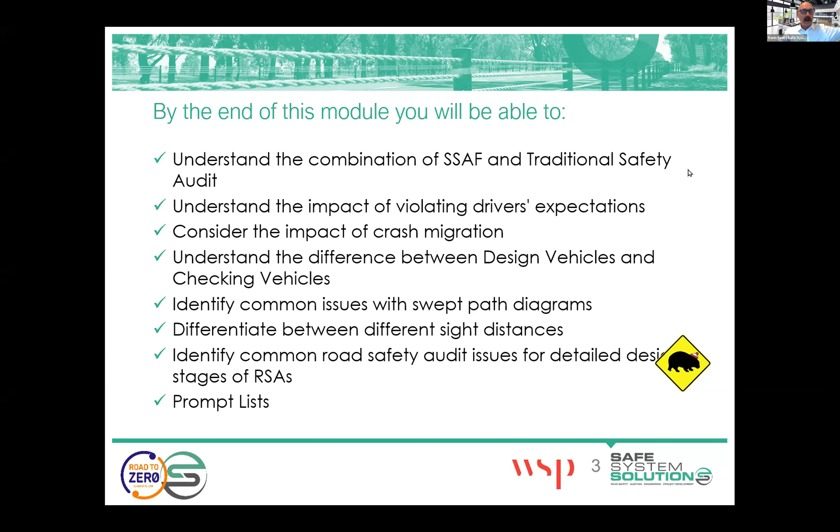The new Safe System Audit Guidelines came out last year as part of the Road to Zero edition. What they did was combine the traditional safety audit we ran in New Zealand with the Safe System Assessment Framework. So there were two things going on, and as I said, Ken's already covered the Safe System Assessment Framework. Going forward, I'm going to focus more on the traditional safety audit. Just looking at the start, the safe system audit stages are: concept, preliminary design, detailed design, and post-construction or pre-opening, and these line up with the project life cycle or project development.

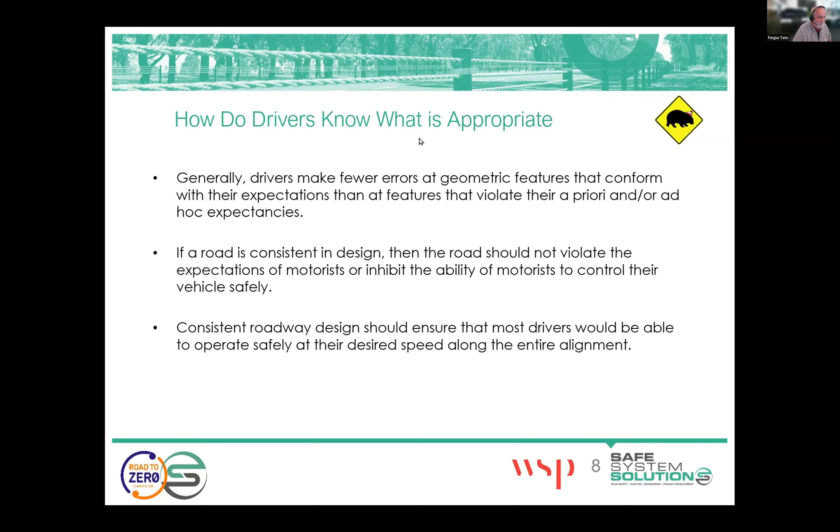As I think I said earlier on, the big one for many networks is curves. Any clown can drive along a straight road - it's the curves. We find that 30% of our DSIs, typically on the state highway network, are on curves. So they're a big ticket item out there.

And there are two sorts of things that impact the likelihood of drivers making a mistake. The first are curves that are difficult to read, that it's hard for drivers to actually perceive them. And the second is out-of-context curves.

I'm going to talk about both of those, but I'm going to start off going back to uni or tech with the mighty curve equation, which says E, which is super elevation, plus F, which is friction - those are the resisting forces. They resist the loss of control forces, which are based on V squared, velocity, over 127R.

Now, my question to you is, in the poll, which of these things has the biggest impact or the most influence on curve negotiation?

Okay, so just recapping there, E is super elevation, F is friction, and we've got V velocity and R being the radius of the curve.

Now, as people pop their thoughts in there, I can see people scratching their heads at the moment. I can't see them, of course, the camera's not on, but I can imagine them scratching their heads.

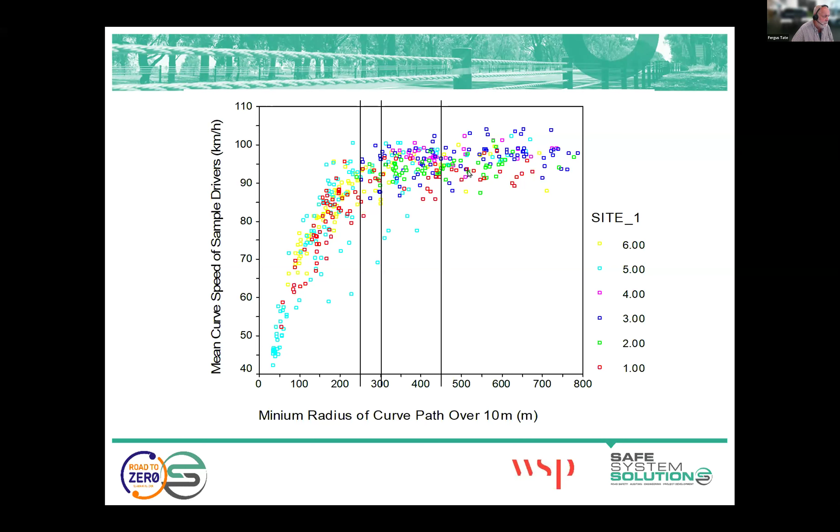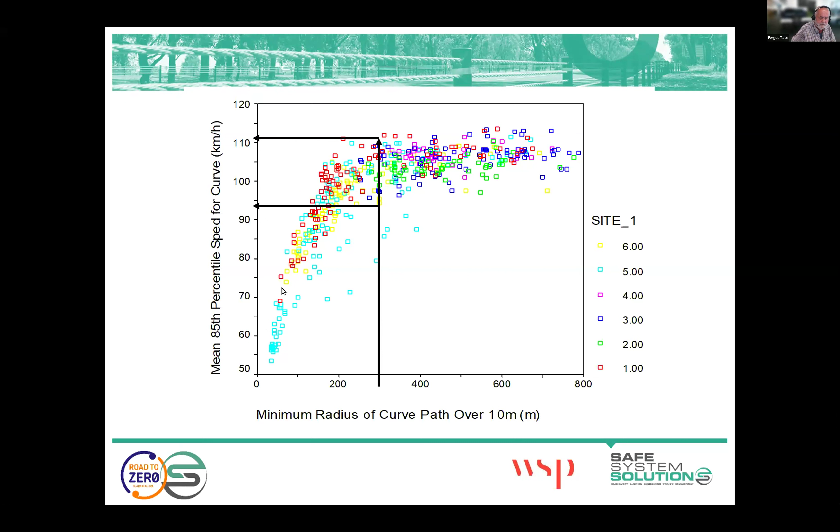So that's really important. So these are the curves that are hard to read. And again, looking at the 85th percentile speeds at a 300 radius curve, anything from sort of 110 to 95 in there, it makes a big difference. You can see with the 85th percentile speeds, it's actually even more pronounced, this sort of straight effect, and then suddenly at around 300, she starts to dive away. So that's the difficult zone.

So maybe I'll ask a question then to the group before we jump too much further on. For that difficult zone, what do people think might be ways to lessen that risk? We'll see what they come up with.

And Juliet's asking, do we have any images to show what those radius curves look like? No, we don't have any in this presentation. I might, while Ferg's doing that, try and dig out a few. It's a good question, just so people can visualize sort of what is a sharper curve compared to a less sharp curve. Thanks for that, Juliet. I'll see what I can dig out.

So we've got advisory speed signs, chevrons, so cams, chevron alignment markers, advisory speeds, advanced warning signs, different advanced warning signs. Oh, we've got somebody's popped in rumble strips on the approach to the curve. Electronic warning signs, possibly vehicle activated style signs, barrier systems. So looking at the severity of the incidents that occur, ideally realigning, so big bucks there. Otherwise, shoulder widening barriers and signage, chevrons and the like. So anything in that big list there that really pops out in your mind?

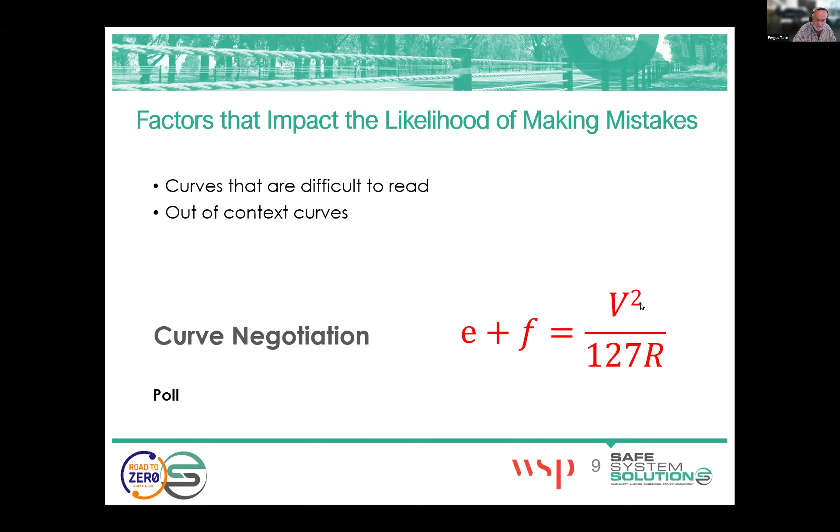And things. And we get some very good results from speed activated curve warning signs. There was a very good thesis done by Steve James from Waka Kotahi on the impact of speed warning signs. So he's now at Urban Connection. He's worth having a chat to if you're interested in that space. He's done some good work in there for his thesis.

The other thing that I think is really important when we're coming to it is the length of the curve. If it's a shorter curve, or like a kink in the road, it's easier to flat line, and it's easier to basically get through. The longer the curves are, the higher the crash rate. Mainly because there's more length of curve to crash in, and we're talking about crashes per curve, but it's harder to flatline.

And if you make a mistake on entry, it's much harder to correct because the curve is long and you're stuck with your decision effectively. So again, long curves in that range are even worse. I don't want you to go in that range, but sometimes we have to, in which case make sure that

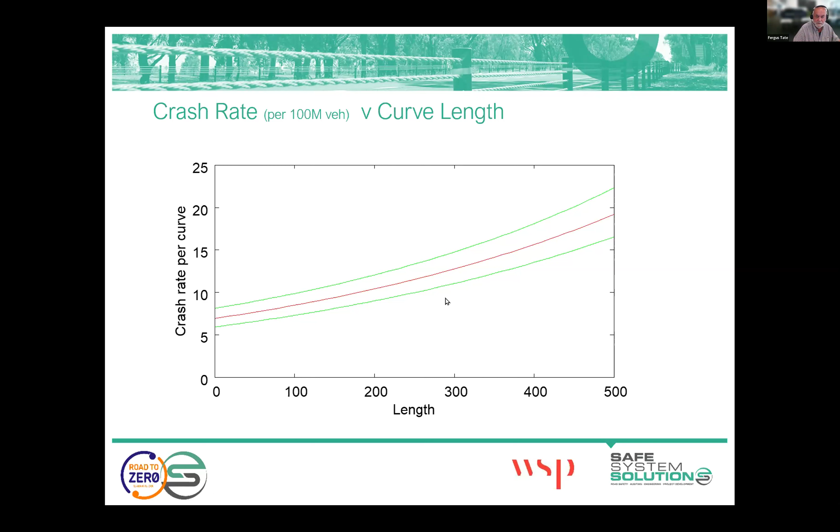they're as short as possible so that we don't run into problems with them. So that's curves that are hard to read. And then how you actually place the curves is also important. One of the things we should try and avoid are similar horizontal curves in the same direction that give a broken back alignment, unless they're separated by a couple of seconds of travel time. These ones where you go into a curve and then you have to have another bite of it and go again, and particularly if the bite is an even tighter radius, that can trap drivers.

But looking at where we place things so that we don't end up with little curves or kinks or railway lines in these dips where you can't see. What you're really looking at is trying to get a smooth flowing alignment where people can see, so that they don't get trapped by things falling outside their expectation.

I mean, if you can see it, Ken, you're the motorcycling expert really. But if you can see it, you can adjust your behavior as best you can. If you can't, then it's all over.

So that's the sort of ones. And then I have just another couple of curves. So this one is showing a 252 radius into a 117. This is a compound curve. So Ferg mentioned broken back curves. A compound curve being those two radiuses, a larger one into a tighter one, with that kink there. So that was that one.

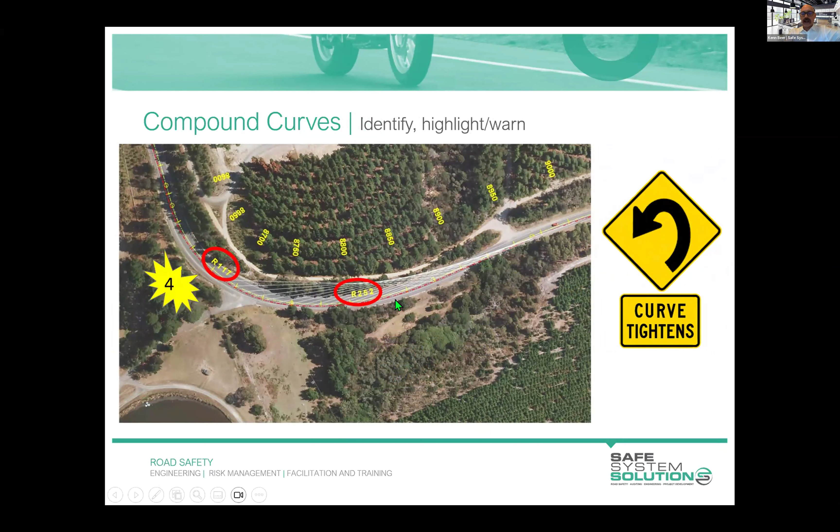And then I'm just going to go forward a few perceptual countermeasure studies. So that will be a tighter curve. This is more sitting in the lower range where people would be more aware of that radius. So I think there are just a few to show you, and I'll let you take the screen back there, Ferg.

Okay, so try again. Sorry. Okay, we're back again. Yep, gotcha. Yep, we're back on that slide.

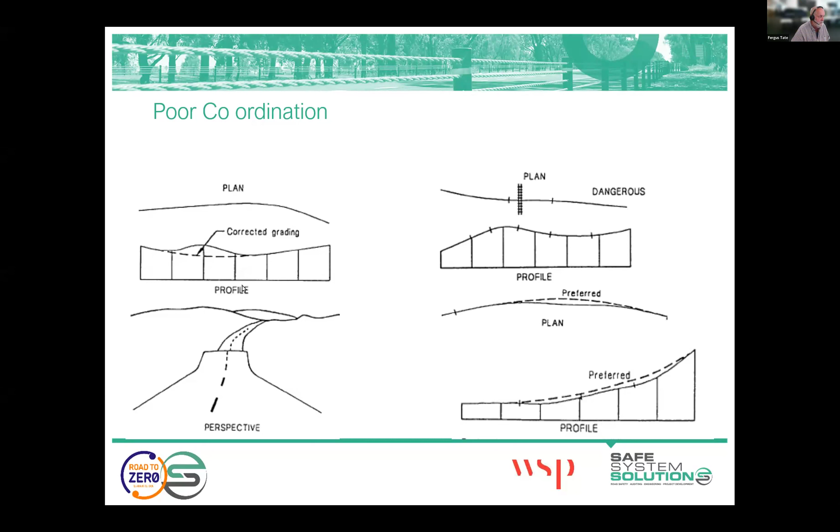Thanks. Okay, so getting the coordination so you get that smooth flowing alignment where you're giving drivers continual clues as to what they may expect coming forward, will get your crash rate down and things.

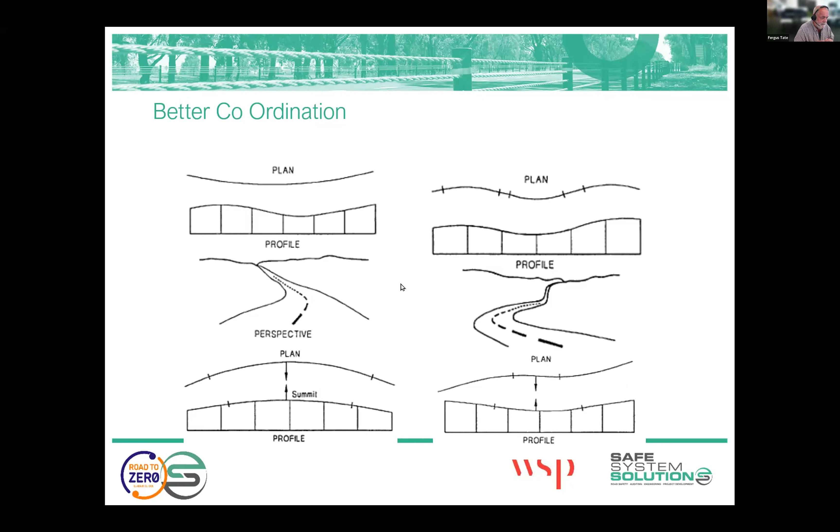The other thing that you've got to be really careful about is design by CAD, by Roads, or by 12D. My friend Keith Wheel once showed me an alignment where in 800 meters there were 6 different vertical alignment components. That's just complete nonsense. You might think you're balancing your cuts and your fills and everything else, but by the time you put a compaction factor in there, getting something to within a few millimeters with a different type of alignment is a complete and utter nonsense. So try and think about the big picture, which is to get this flowing alignment that's easy to do.

Now, the next one is we've been talking on and off about out of context curves.

Now, this is an interesting arrangement because if you think about how we signage curves that are out of context, we typically just put a curve sign in if it's 10 kilometres out. We put a little advisory speed, typically if it's 20, so we'll have the normal curve sign with the advisory on it. And then when it gets up to about 30, you've got the full chevrons with, we call them the PW67s, with the speed value on the front of the 4 chevron board, and then the chevrons all around the curve.

That comes from some research that Sam Charlton at Waikato University did, where he found that the number that you actually put on the speed advisory was not as important as the size of the advisory, if you like. So drivers recognised that 4 chevron board with 65 on it, and the chevrons around the curve, did almost the same speed when it actually said 85 on it, because they knew that having that full drama of signage meant that this was a tight curve.

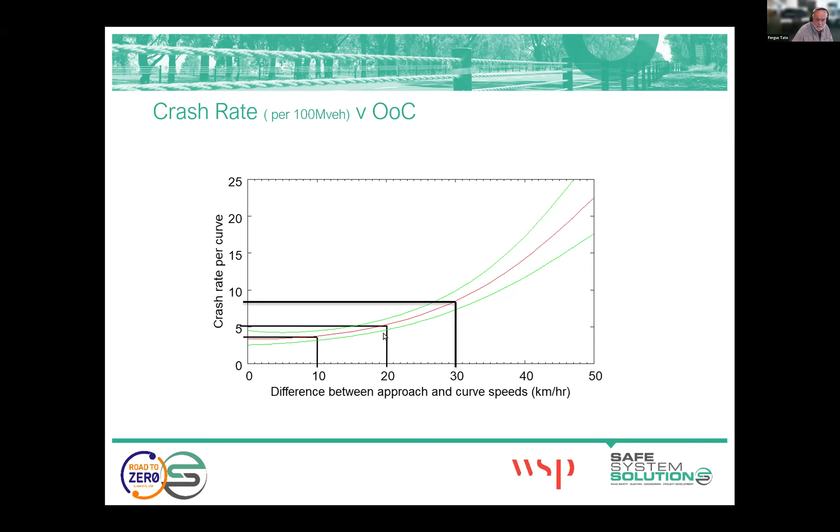You know, Ken often asks me, where do you stop? But if you improve the next curve and that's running the speed increase into the next one, go back to this graph. Where you're not changing the speed environment by more than 10 or 20, and you can get away with signage, that's the point where you stop. But you need to keep going downstream because your works are what's creating this road hazard going forward.

Anything, Ken? Max has just put in a good point. I had said earlier in the course about us doing this safe system assessment and the reasons for its integration into the safe system audit, to ensure that we don't just see those audits coming back which say, put up a warning sign or the like, where we're not actually fundamentally addressing the issue. But he's rightly pointed out these scenarios are probably ones where we do see a lot of benefit from correct signage.

Yeah, I was probably more talking in the context of some of those high-speed crossroads and those sort of things where you've got a very significant issue and a warning sign really is not going to do it from that perspective. This one, we also have a significant issue, but correct and appropriate signage is good. The other thing in here is a question around, did those passing lane benefits exceed the benefits gained at the project location? So

Who's this? That was Max again. Okay, Max. Oh, damn. I've actually got another whole presentation on passing lanes. I know, because you did that Austroads project recently, didn't you? I did. Yeah, yeah, yeah.

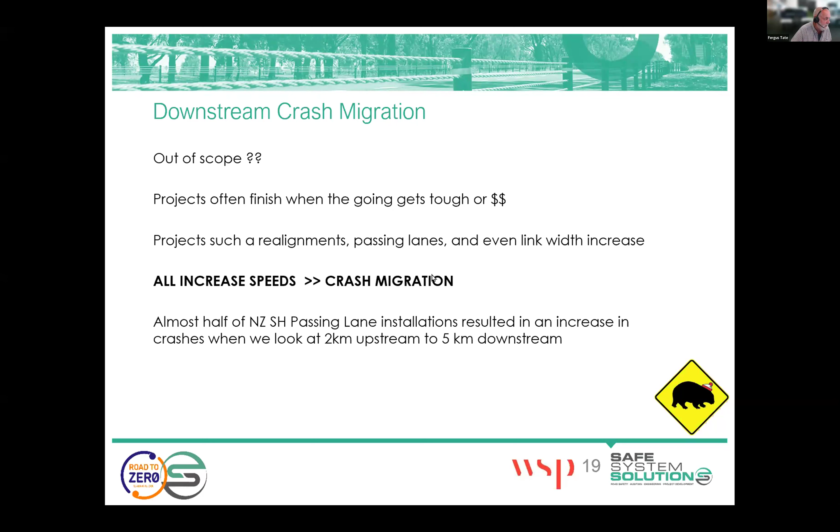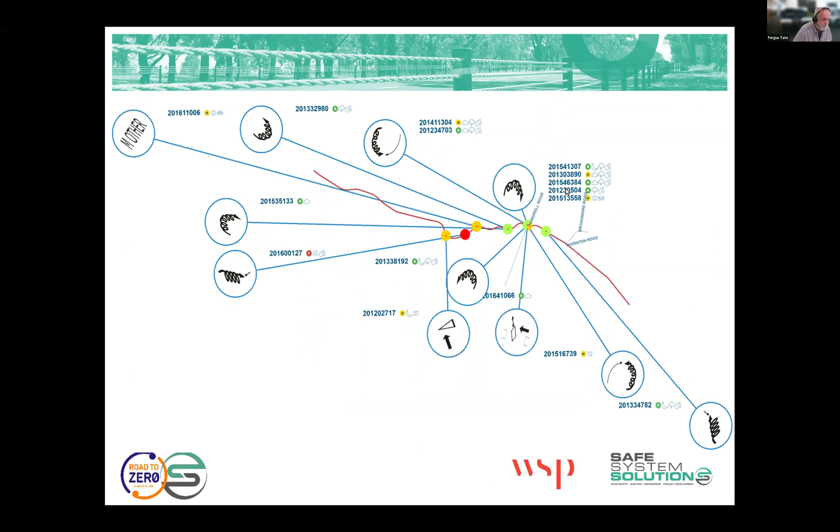So while I talk theoretically about this, this is all driven by crash relationships and looking at the geometry, particularly if you're doing reactive work, looking for places where the super elevation drops off. This often happens when you go from cut to fill to cut. Over time, the fill drops a bit, and you get flat spots. But the other one to really watch out for are these curves where you're coming in at one radius, it's only short at that radius, and suddenly it tightens. Ken was showing you those curve tighten signs. We haven't had much traction on those in New Zealand.

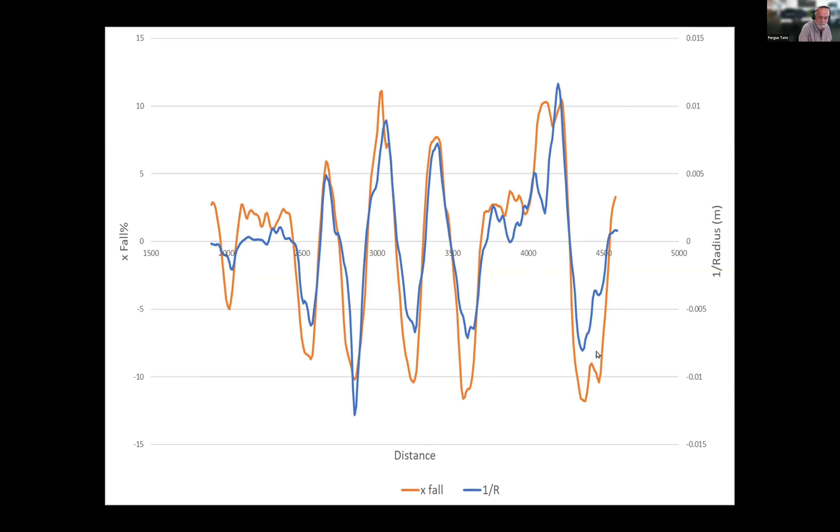Again, it's coming in, it's tightening, and then it's tightening again, and the tightening again lines up with the drop in super elevation. So all of these are going to trap drivers because their expectations are that they should be able to go around a curve that looks like this, not that, and that they will have a certain amount of super elevation going through. So those are the things to watch out for.

Right, I'm going to talk about design audits, because they're the next hardest, I think, about the sort of things that you need. Crash history shouldn't drive a road safety audit, but you should be aware of the crash history, particularly if it's an improvement, to understand what it is that's trying to be addressed by the improvement and what sort of things are likely to happen. We need to be aware of who's going to use the site and for what purposes. And we'll talk about design vehicles in a minute.

But again, you'll find that regular users have a different pattern of use to tourists or one-off users who don't know that just hidden over that crest is a bloody railway crossing, and who are possibly looking at the scenery and don't see the railway crossing sign. But we do need to.

Oh, sorry, you got something to say, Ken? I was just going to address Ash's question that had just come in. It was more related to some of the data you were showing and data that we would look at and interrogate as part of a road safety audit. And probably the data you were showing there is far more precise than we would be looking at in any audits, if you are given different skid resistance data and elevation data. But more from the audit perspective, you get a feel for that if it's an existing road by driving through it. And also, if it's a design, you can look at that from the geometrics of the design.

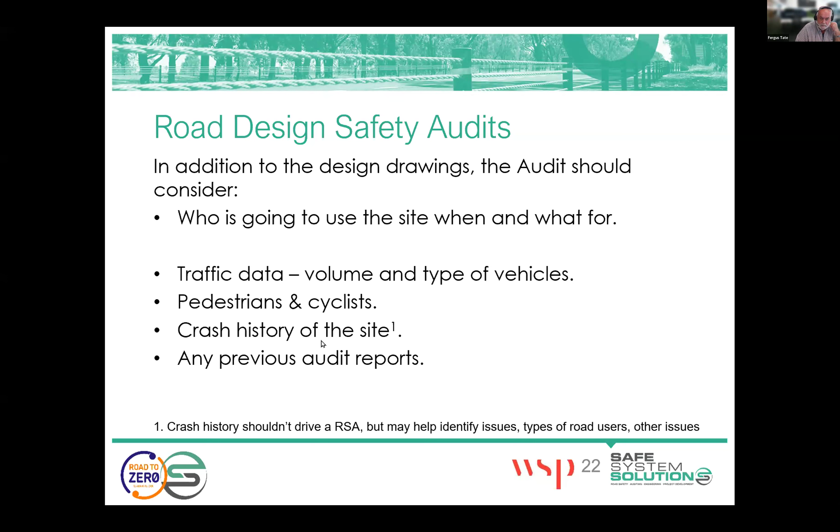If it should be a 500-meter curve and they're only going to 400, and you've said it once, you can say it again in the design. This would be better. The safe system assessment will tell you the same thing. Don't just say, 'the client decided last time, therefore it's out of scope.' Have the courage of your convictions going forward.

Heavy vehicles come up time and time and time in audits. I'll talk later about a recent example we've had. But who can tell me the difference between a design vehicle and a check vehicle?

All right, we'll see what people pop into the chat on that one. We've probably got about half an hour left at most, okay? Just to flag things, I'm enjoying the discussion, which is always fun.

Let's see if anybody puts in the difference between a design vehicle and a check vehicle. Here we go: check vehicle should be able to get through at slower speeds. Design vehicles during the design phase, checking vehicles after construction—not sure about that one. Design is what you expect to typically use the location. Check vehicles more for one-off users to ensure there are no issues. I like that one from Ash.

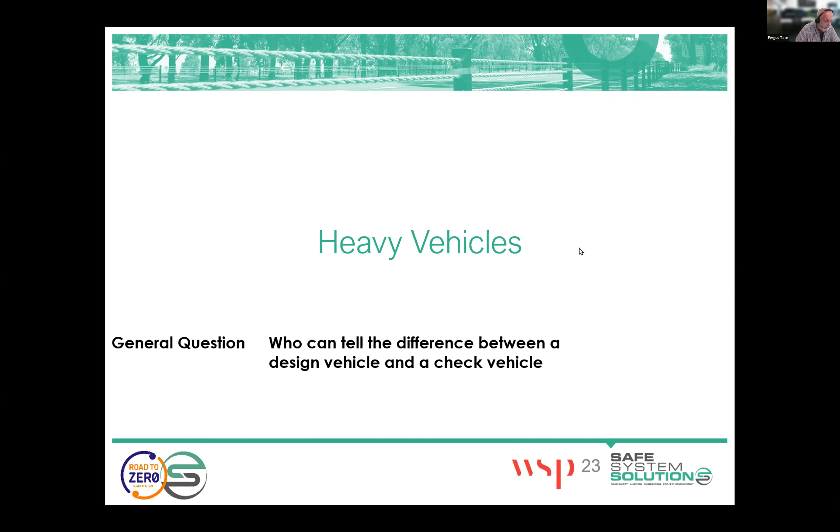A few others coming in. Ferg, you happy with Ash's one? Yep, I think the big thing is—give Ash a prize for that. I think Max was there as well, and a few others coming in. But we'll give Ash the prize for that one.

The design vehicle shouldn't encroach on the shoulders, footpaths, or adjacent lanes, whereas the check vehicle should just actually fit through if necessary with small encroachments. Now the choice of design vehicle becomes really important because not every piece of road has to have a quad axle semi go through it. But on the other hand, if you're on a rural farm road with tankers, then you're likely to have tankers which are going to be quad axle semis, so it's important, even though the volume could be very low, that they can take those.

And then the check vehicles are the one-off heavy haulage and things that are going through. Where it becomes really important, I find, is the right choice of design vehicle.

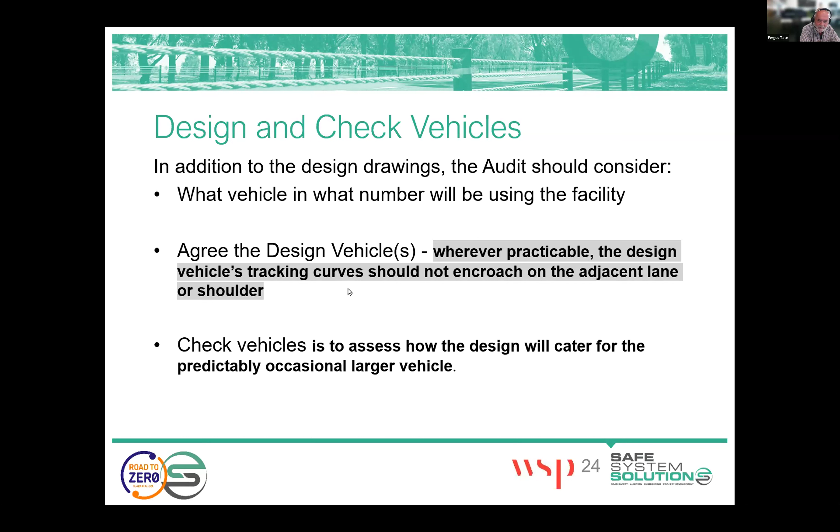I've just seen a design for a bus route, and we're going to talk a little bit more about buses in the next couple of slides. It will take a quad axle semi all the way through, but it won't take a 12-meter coach. Everybody goes, well, why is that? But you've got to remember a semi has got an articulation point and a coach doesn't, and a coach has got a very big front and rear overhang and swept path. So knowing what it is and not just assuming that a 25-meter B train will get you through, therefore anything can go through, is something to be very careful about.

So choosing the wrong design vehicle is a common issue. The other is that swept paths are always plotted using a speed.

You need to know what the appropriate speed assumption is. Because if a vehicle is moving from lock to lock, turning hard left and then hard right to make the maneuver, that's easily done at low speed because there isn't much drift. But as that speed goes up, those swept paths get larger and larger. The number of times I've found an open road site where you're expecting a vehicle to make a slip left turn, and suddenly you find they've used a 5 km/h turning speed, when you know it's going to be a minimum of 30 and probably 50 km/h. Go back, draw it - oh shit, it doesn't fit.

So always, if anybody shows you swept paths, ask them what the speed assumption was that they were based on. And then ask yourself, is that real? And if not, tell them to go back and do it at one that you think is more appropriate.

I think a few people are just trying to get their head around some of this, so I think some diagram examples of swept paths will really help people understand what we're talking about - what is a swept path, that area which a larger vehicle sweeps around that's not on its exact wheel tracking line, which we'll see in some examples shortly. And then we'll delve a little further into some of these specifics with some examples. Always easier with examples, but let's keep going.

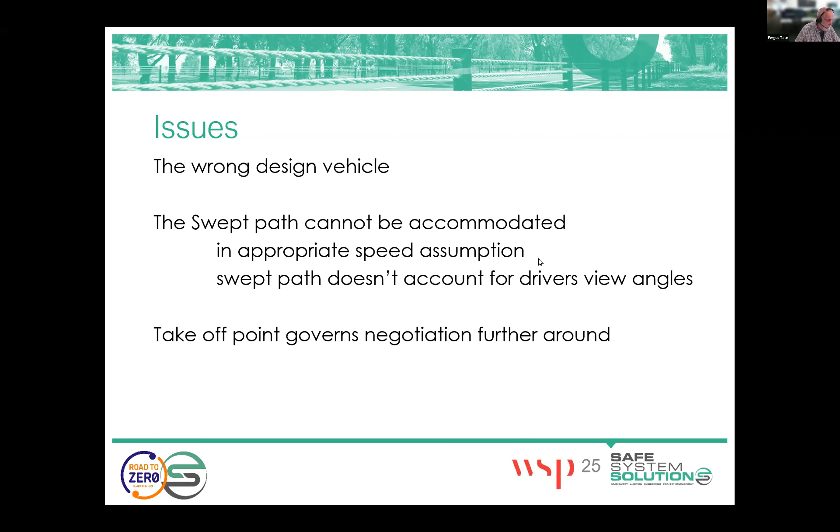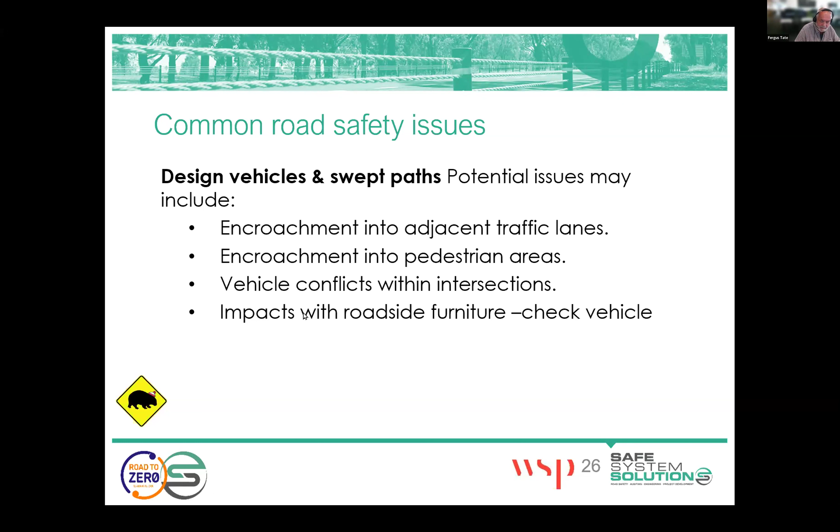The things you're looking at for the swept path are things like encroachment into the adjacent traffic lane, encroachment into pedestrian areas, conflicts with other vehicles at intersections, and roadside furniture, particularly with the check vehicle. The design vehicle shouldn't get anywhere near roadside furniture at all, but the check vehicle may get close, and you need to be careful. So we've got some examples.

So here are some turning paths, if you have a look. This here is a semi-trailer, a 19-meter semi, and when it drives around, you'll see that the swept path is far bigger than the vehicle itself. That's the path it sweeps from its outside mirrors or body, usually plus half a meter - most software will do that.

Here we've got two going around together, and the recommendation from Austroads is that you should have a meter clearance between them as they come around and make this curve. In the old days we used to do it with pieces of plastic with paths marked on them, and you'd hold them over your drawings. Now, thanks to the wonders of CAD, you can just slap them on and put them there.

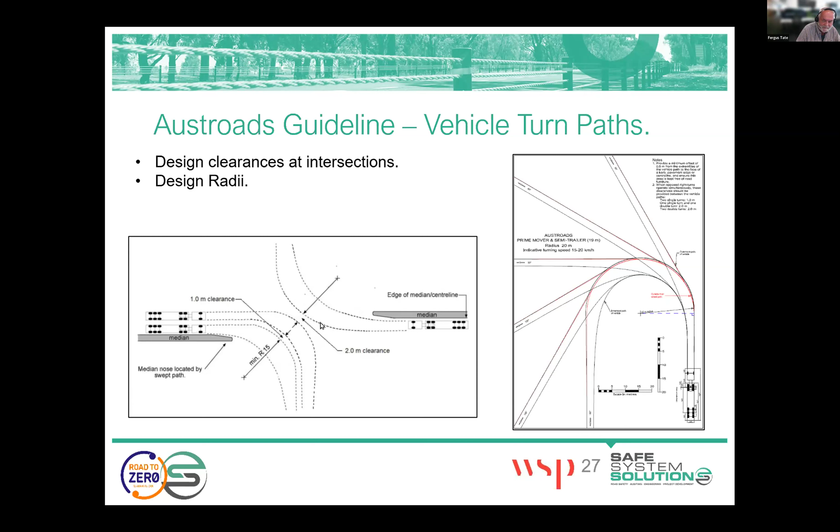What that does mean, though, is people do all sorts of weird and wonderful things with swept paths to make them fit, and some of them don't make any sense at all.

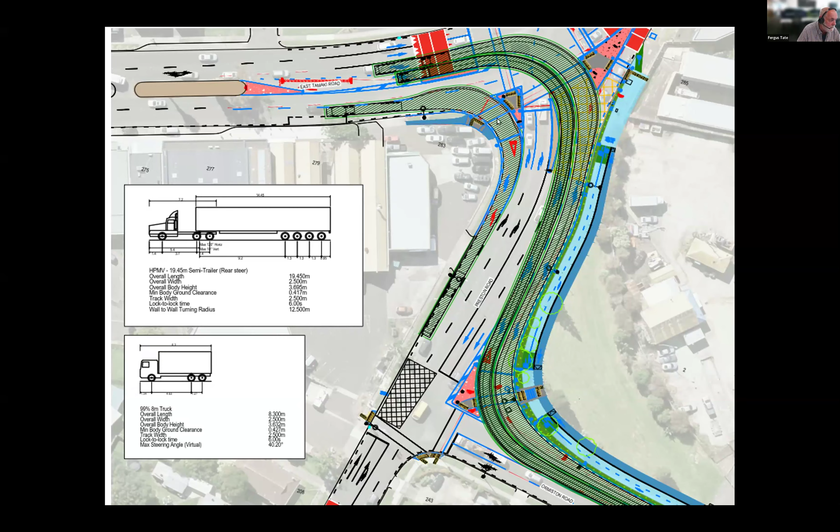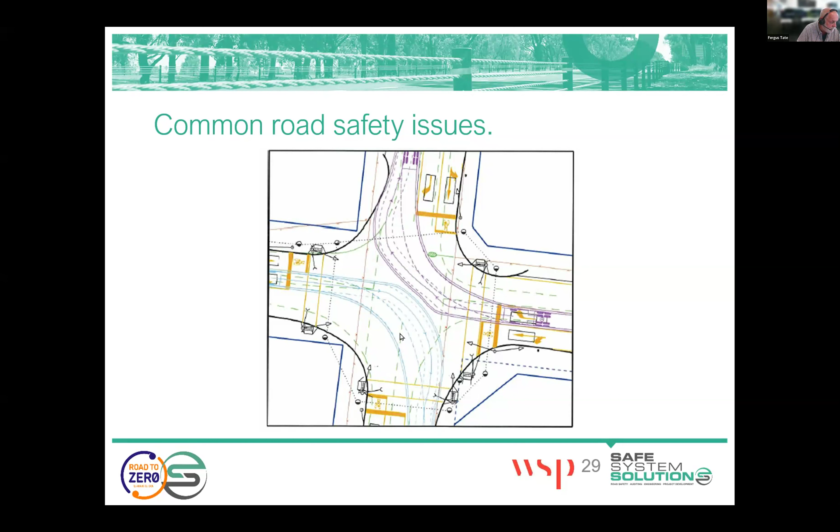This is actually going left, then slightly right through here. Sorry, going right and then slightly left through there, and then going right again up here to get through. That's a very difficult path to drive and would actually end in conflicts. This one down here, coming around here, big swing out, right over to come back round to get through, because that trailer width is so large going across that intersection.

Oh, I forgot that one - this one here, going around here, going over the curb. This is where the pedestrians are standing. So going over the curb, wing mirrors encroaching on the curb area. Buses - there was some work done by Frank Lye a few years ago on bus incidents in the UK. The most common incident was being struck on the head when you were on the footpath by the wing mirror of a bus. People wait here, on the tactiles or wherever they are, and then something oversteps, and it's on the left side, so they're not really seeing it, and it hits you in the head. So that links a little bit with the question about the 500 mil tolerance that's added there.

For those not familiar with that, you can see there's two lines on the outer - your wheel tracking is the dotted, and then you've got your swept path, and then a tolerance there. Do you feel that 500 is excessive, or is that trying to cover off those wing mirrors and other bits, or a little safety factor? It is, and then you'd expect, if you've got two opposite each other, the Austroads guidance is for 1 meter between those two outer envelopes. But it is to give you a safety factor in there.

This is one of Ken's - this is a bus depot in Melbourne. Ballarat, actually. So this is a bus depot. What do you have at bus depots? You have buses, and you have people that want to catch buses. So why on earth would you design a swept path that goes right through? That's the body swing on that coach, going right through that area.

Now, if you were a visually impaired pedestrian who has a higher likelihood of being on a bus because they can't drive, you'd be standing by those tactiles, and because you're visually impaired, you've probably got no idea the bus is about to take you out because you feel safe at a bus depot. But no, this is a shocking design.

It's going the wrong way, I think, in this area here. And it gets a bit close over here too when you're looking at the two paths for the buses coming in and out, so we've got to be really careful looking. This is, you'll probably find you can get a quad axle, an artic round there, but not a bus, because buses have much bigger forward and rear overhang distances on them.

It's funny you say that, Ferg, because in this one it often comes down to some constraints people had. They had a number of car parks they had to put in, so they were pushing their boundaries on car parks. The first design that came in for auditing had the quad axle semi as the design vehicle, which fit around that location. That's where the auditing process - stepping back and questioning their actual design vehicle choice - came in, saying, well, hang on, this is a bus depot, you have to use a bus as your design vehicle if it's going to be worse in that sense. So that's another example of where auditors are assisting with these checks on design vehicles.

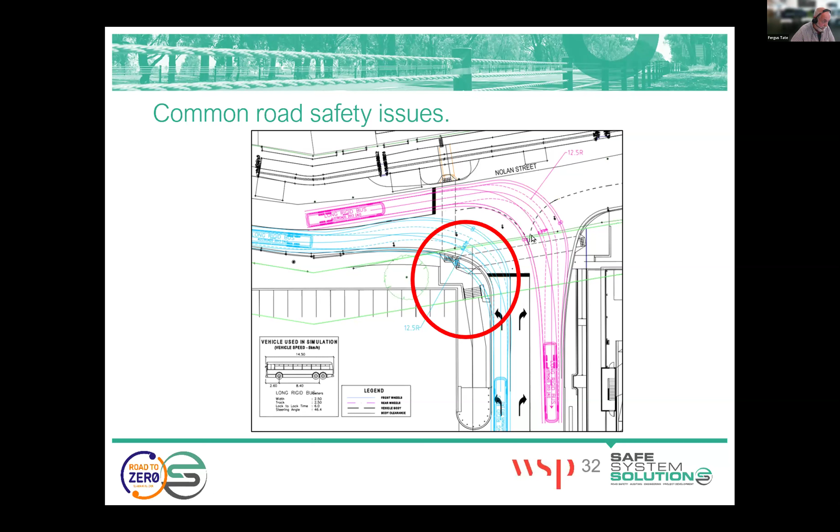Most people don't understand that buses are actually coaches as opposed to buses, I suppose. Coaches are a much more difficult vehicle to accommodate in urban areas than something with an articulation point. This is another one here where we've got conflicts in this area - the exiting bus and entering bus can't actually pass each other.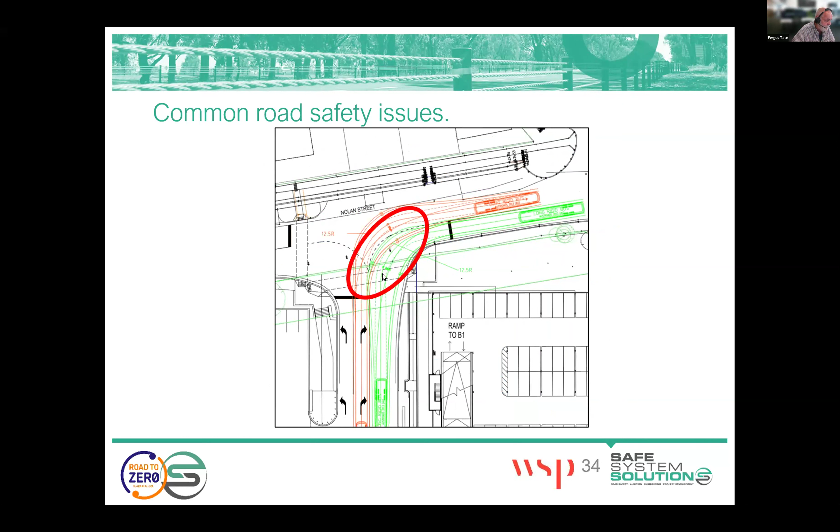This is one from Masterton. It's a bit hard to see in these colors, I'm not sure if I've got it, but this is an interesting one.

In order to make this turn here, the vehicle has to change from hard left to hard right lock. If you're doing that at 5 kilometers per hour, that's doable with this sharp change in direction at this point. If you do it at 30 kilometers an hour, it comes way over here and is far smoother, and you end up hitting the island. So knowing what the negotiation speed was at these drawings, anywhere you get this picture of changing lock should ring alarm bells.

The other thing you see in this one is the expectation that the driver's going to go in here and out and around. They're not going to do that. They're going to cut through there and end up in conflict in this area. So you just need to have a little think as you go through.

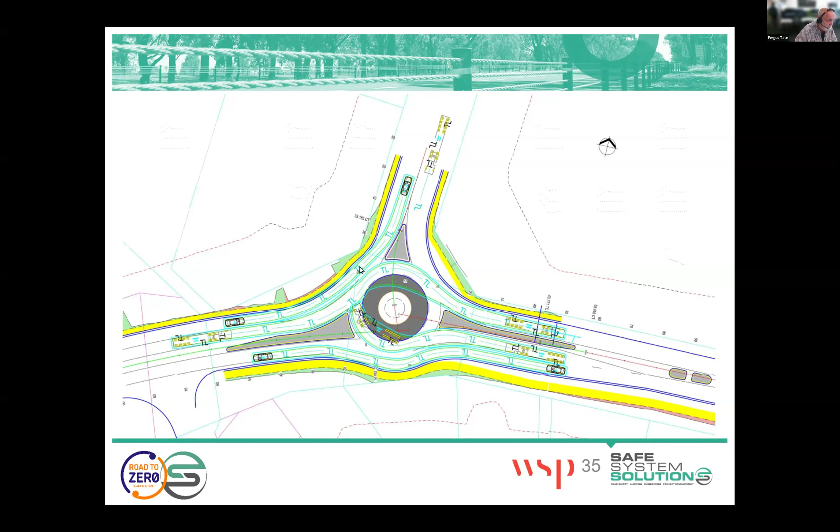This last one is about what I call driver's view. If in this picture you are parked here at the give way line ready to pull out, you can't actually see back to what's going to hit you on this curve because it's behind you. If you pull this give way line round squarer so the driver can look out their window at what's coming, they can't actually make the turn without taking out the barrier.

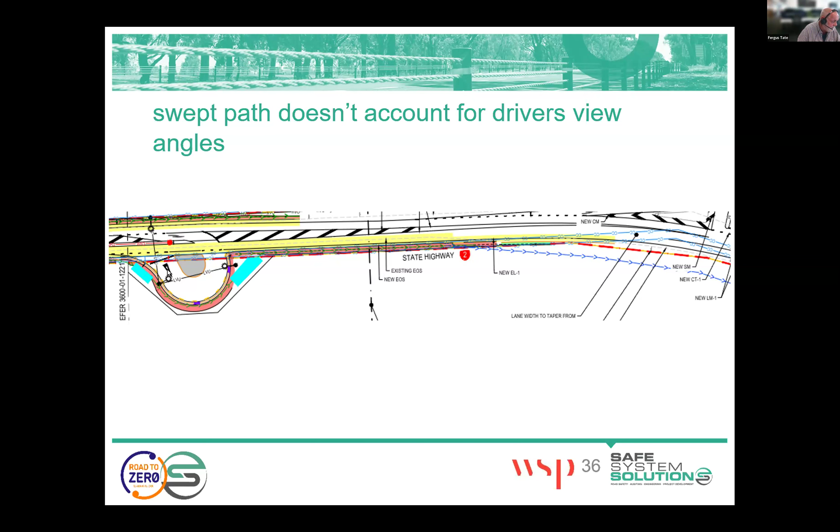So you need to understand where the driver is sitting in relation to his mirrors and his windows, to make sure they're actually going to sit at the place you think they're going to sit. In this case, they won't. They'll sit squarer here so they can see, and then it makes it very difficult to turn inside that barrier.

So, look for evidence. These ones obviously aren't doing it so good here. This is a beaut in terms of tracking through there. Obviously, the impact on infrastructure.

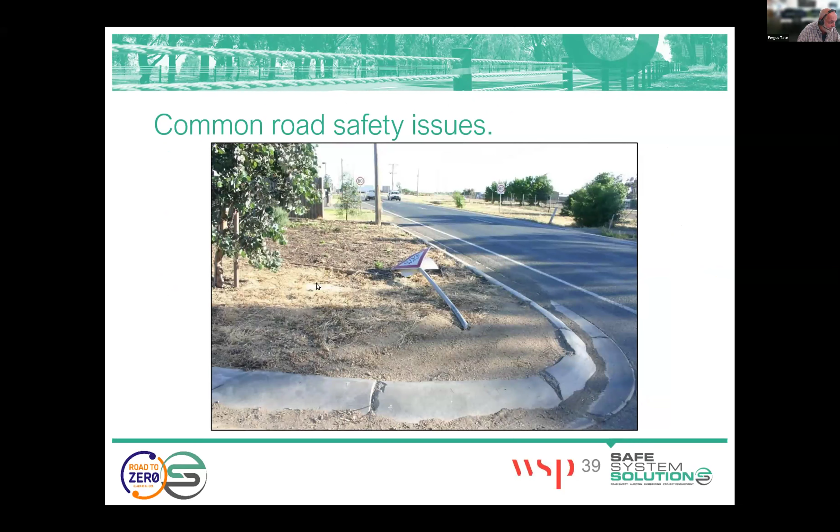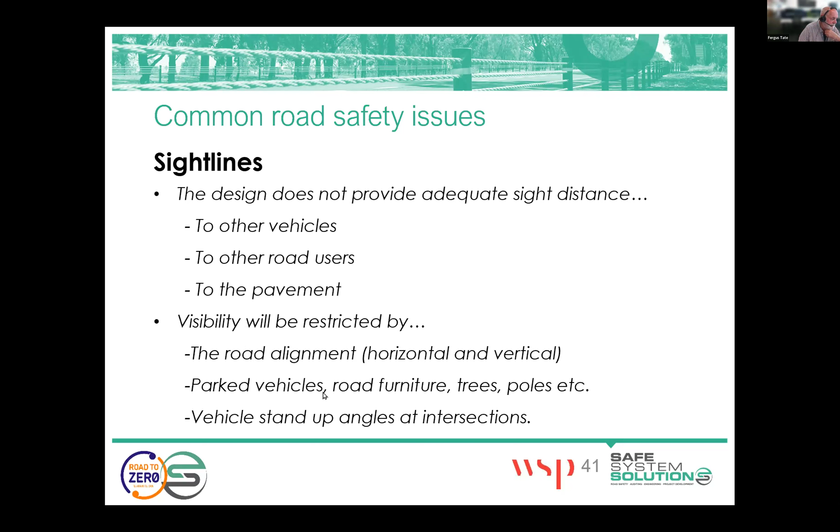And the last one I was going to look at is sightlines. Do you know how many different sorts of sightlines there are in the Austroads standard? There's a lot, there's a lot. I should actually count them up and make a poll, but typically the other users, the pavement, the things - understanding what the sightlines are and what constitutes adequate sightlines comes up time and time again in audits. The big one is often for side road entry.

Safe intersection sight distance - you're sitting back, looking at the vehicle coming down here to identify how big a gap you can go out into. If you can't provide that, then you have to provide safe stopping sight distance, which is the sight distance from here to here that says this vehicle will stop if that vehicle pulls out. That's effectively changing the priority of the intersection, because what you're really doing is requiring the vehicle who's not expecting to have to stop.

And then the classic I've seen is they've said, because it's an urban area, for this safe stopping sight distance, I only need 1.5 seconds of reaction time, because it's an urban area. But what you're really saying is, I'm not expecting to stop, so I'm going to use the smallest reaction time. That's a load of rubbish. If you're not expecting to stop, you need the biggest reaction time.

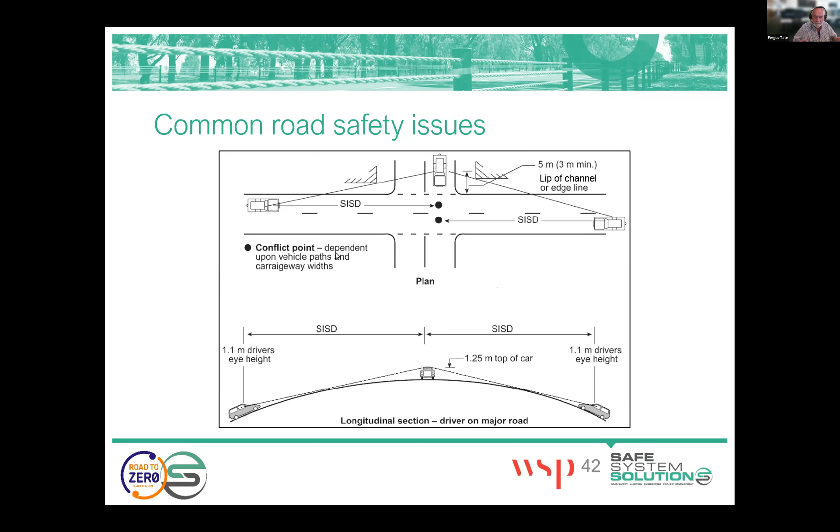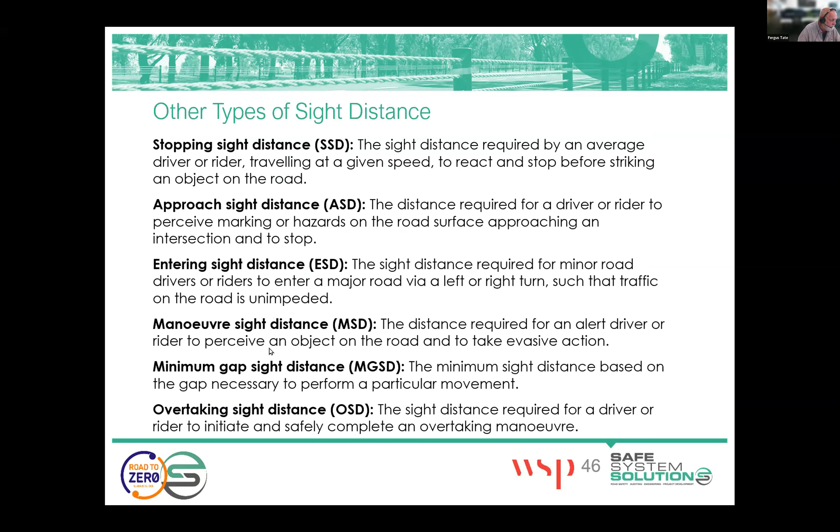And then the last thing is some of the common issues we find around intersections, including the stand-up angle, the sight distances, roadside hazards, and backs of queues. You need to know what the 95th percentile queue is, and then put braking distance on the end of that to calculate where a vehicle is going to slow down.

If you've got an off-ramp that queues, the last thing you want is for vehicles to be decelerating on the main highway line in order to make the back of that queue, because that's violating the expectations of the drivers behind them. They're not expecting somebody on the main line to be slowing down.

I think we may have shown this group a Danish offset in the pedestrian presentation. Just to clarify for anybody trying to visualize that, that's where you have pedestrians crossing into a median, then they walk along the median a bit, and then cross again. You could configure it as a Z or a backward Z if you're looking down on it, so all pedestrians are facing traffic when they cross. But as Ferg just gave an example there, yes, that helps a bit with safety, but if you design it and nobody's going to use it in that configuration because they'll just walk where they want, you lose a whole lot of value. So you've got to take it case by case.

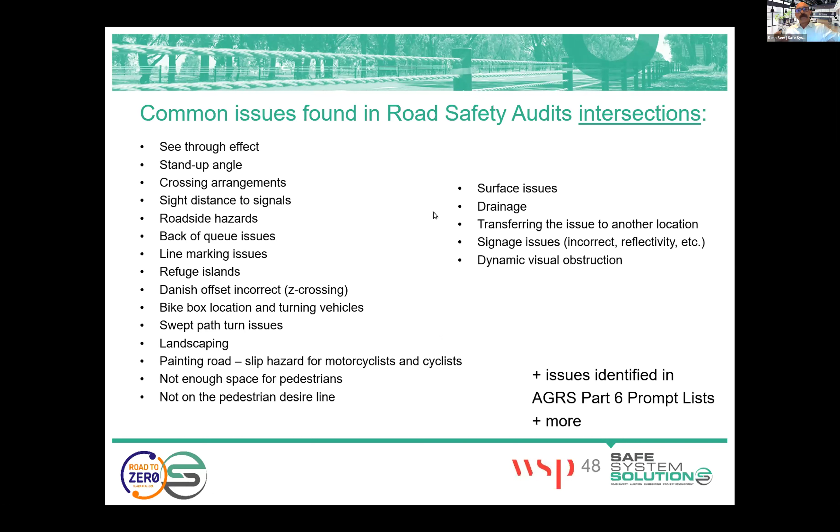Okay, and then when we're looking at the mid-block stuff, particularly around roadside hazards, they have a real impact on the severity of outcome, and managing roadside hazards is really important. Do you do a session on that separately? We had a bit at the start around roadside hazard management, barrier systems, and flagging the technical nature of some of the barrier stuff as well. That's really important, because it has a major impact, and it certainly comes through in the safe system assessment framework in terms of the severity of outcome lines.

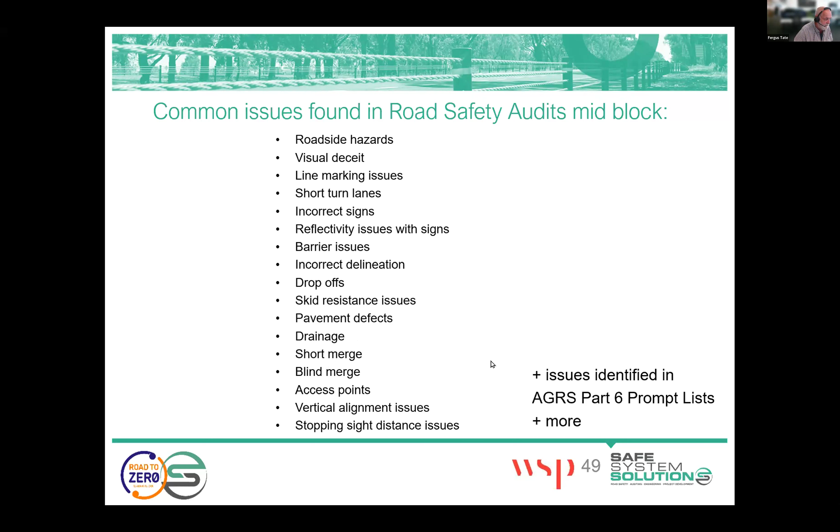Drainage, short merge, blind merge - there's a series of prompt lists in the back of the Austroads guides, which I really like. They come right down to detail, like: are the bus stops located with adequate visibility and clearance of traffic lanes? After you've used them a few times, you'll just think of what the public transport issues are. But it's really important, particularly when you're new to this game, to take the prompt list with you. There's nothing worse than getting back to the office and going, did I check the service coverings? Were they in the middle of the traffic lane for motorcycles?

Oh shit, I've been through all my photos, I can't see it. Oh damn, I've got to go back out, and it's an hour out to site. Do the prompt list - it'll help save you time in the long term, because you won't have to make return trips.

And that reminds me of something I should have mentioned: photograph, photograph, photograph, and photograph some more. I don't take a lot of notes now when I go to site to do an audit - I walk around and I photograph. Sometimes, if I leave it too long before writing up, I think, what was that photo for? But then when I look at the photo, I can work out what it was, because every photo has a reason why you took it, and that gives you the answer.

It's so much easier - if you have to write 'at chainage 327 on the left-hand side behind the such and such,' you've written this much just to describe the problem. If you simply say 'see photo,' it makes your audit report easier for you to write, and a lot easier for the reader to actually understand. They don't have to play mental gymnastics about where in the design you're talking.

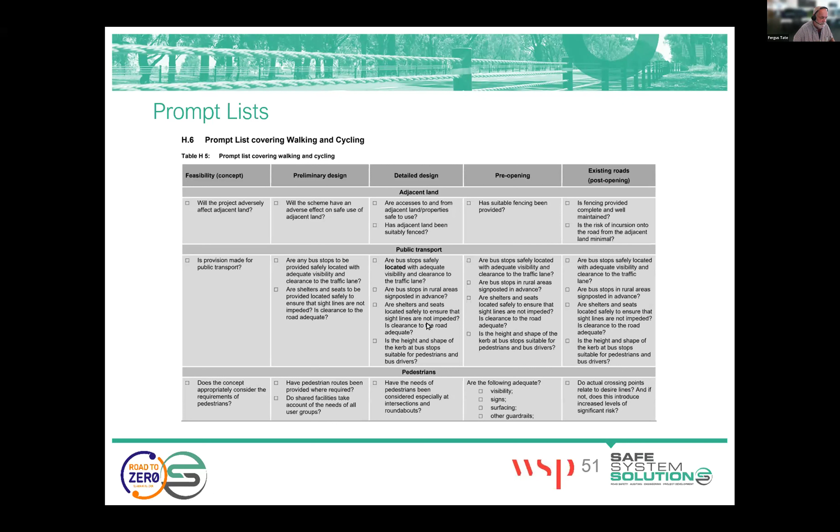And photographs are really good for post-construction. For design audits, snipping from the drawings and putting that in, then saying 'here is the problem,' really, really helps you write the report and makes it easier for people to understand. Absolutely.

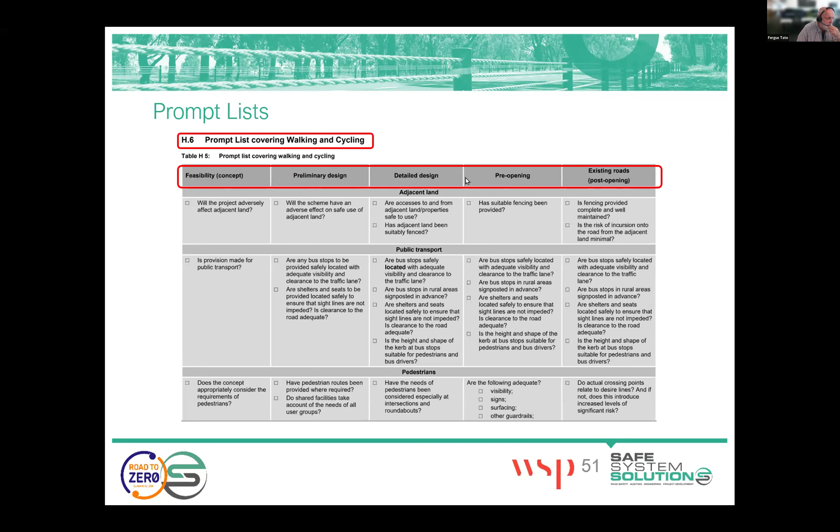So yeah, prompt lists are hierarchical and they cover different things. So after a while, you can just sort of do walking and cycling, detailed design, and you don't have to remember all these bits, but it helps you go through.

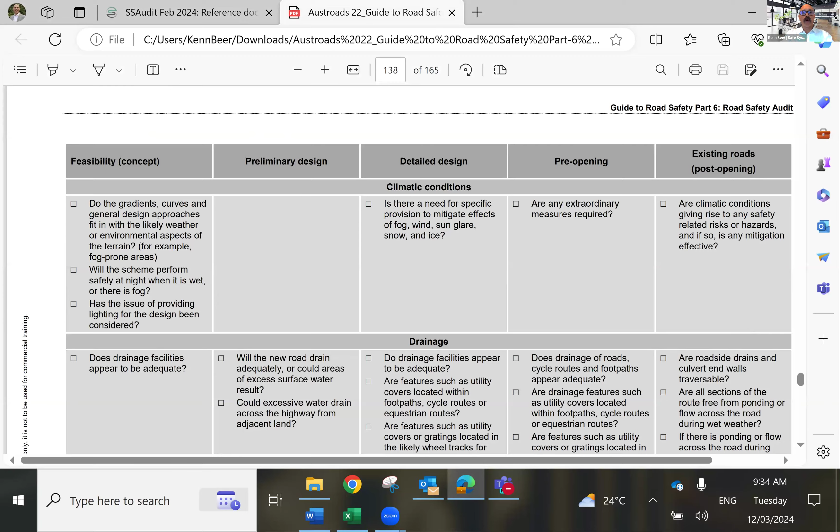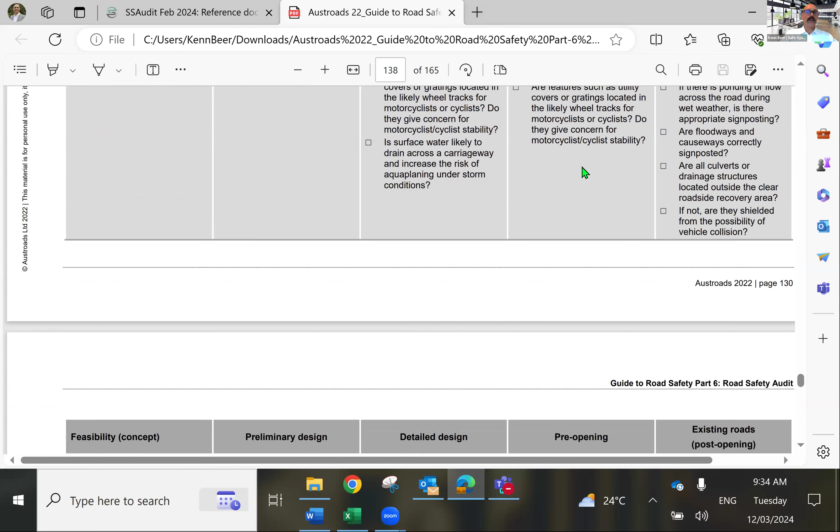Now, the prompt lists are there, as per their name, just to prompt your thinking. They are not like a checklist that you would use and tick every box and then hand in. We don't want these as part of a safe system audit. They are simply there as thought starters, to help you make sure you're covering lots and lots of things. They certainly don't cover everything you might find in every scenario. They've tried to ask general questions, but they don't replace you just logically looking at the site, the design, and making those calls.

So that's in there. Of course, you've got your Waka Kotahi Safe System Audit Guidelines that doesn't have a prompt list in it. So the Austroads Guide is the one you can look at there. So let's jump back a little bit, and I want to show you where you will be finding the assignment.

Now, you're all very good at the learning management system, but you'll see here we're in module 5, and you can download a copy of Ferg's presentation there. What we have here is an example safe system audit report. Okay, so we've popped one in here so you can actually see what an actual safe system audit report would look like. That's for you to look at.

Feel free to copy parts of it. We're not precious with any of that in terms of standard words and everything like that. Obviously, this one's for a particular site, but that will give you a nice bit of an indication of what a safe system audit actually looks like as an output.

You'll see here that we have module 5 assignment, site inspection, and write your audit report. That's the big assignment. But below this, a couple of things that I want to flag right now is that you are going to have to agree to this safe work method statement, because what we're about to ask you to do is go to a local site. You've given us an address, and we've then found a site close to you where they are proposing to do some alterations, or some alterations have been designed to the road or street or intersection in that area.

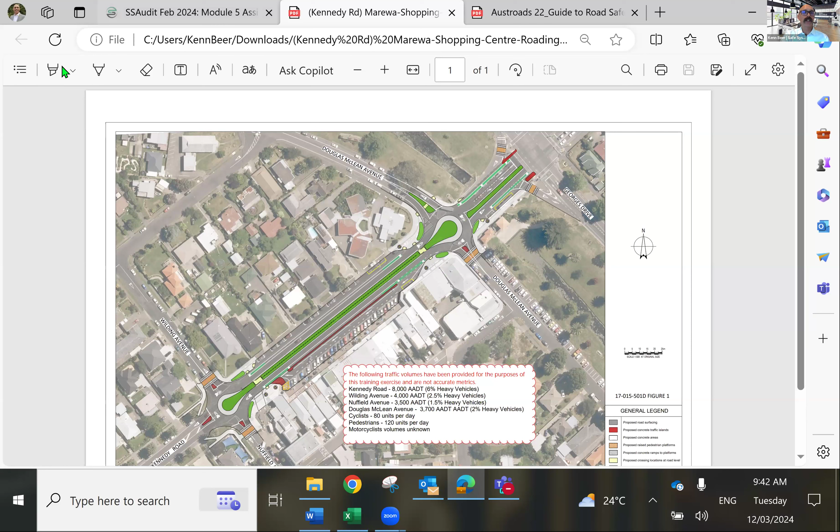You'll get a design. So that currently does not exist or shouldn't exist yet. Occasionally they've built it in between us finding the design and you having a look at it. If it's built, just get in contact with us. You can still do the exercise. It's a slight little bit of difference. So you're imagining all of that built, and then you're undertaking your safe system assessment accordingly.

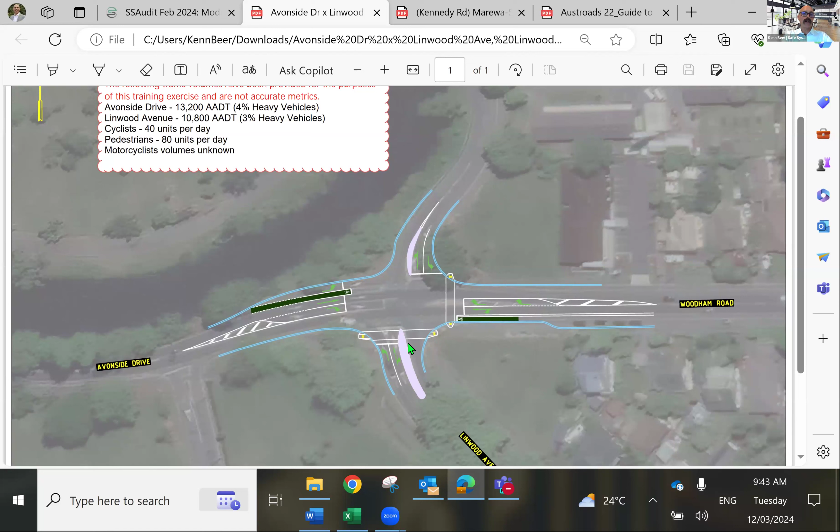And probably a good example of where, have a think about where you're going to park or how you're going to get there, and where you're going to stand. There are plenty of areas to stand away and park a car if you're taking a car out there, in areas that are not going to impact on other traffic or not going to put you in danger as well, or push cyclists into dangerous areas or the like.

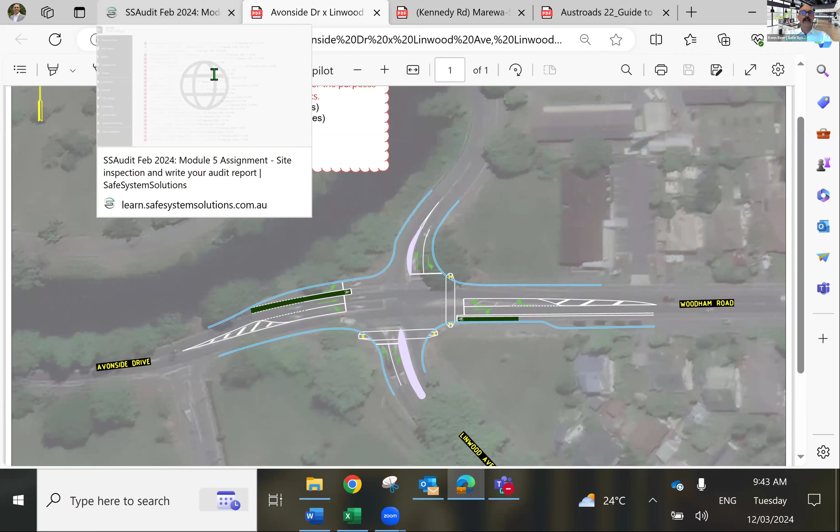Okay, so you find your design. You make sure you're wearing your high-vis vest when you go out there. And then you're going to have a look at the site in its existing form. You're going to look at your design, and then you're going to start working on your actual assessment. So you click on this Word document, and there's an Excel graph generator just to help you out.

So the Word document here, let's have a look at that. So we've clicked on the Word document. It's the Safe System Audit template from Waka Kotahi. We've just adapted it just a tiny bit for the training course purposes. So you'll be looking at a very preliminary concept style design. We have not given anybody detailed designs. That would just take you way, way too long. And we're just proving you understand the concept of what we're going through.

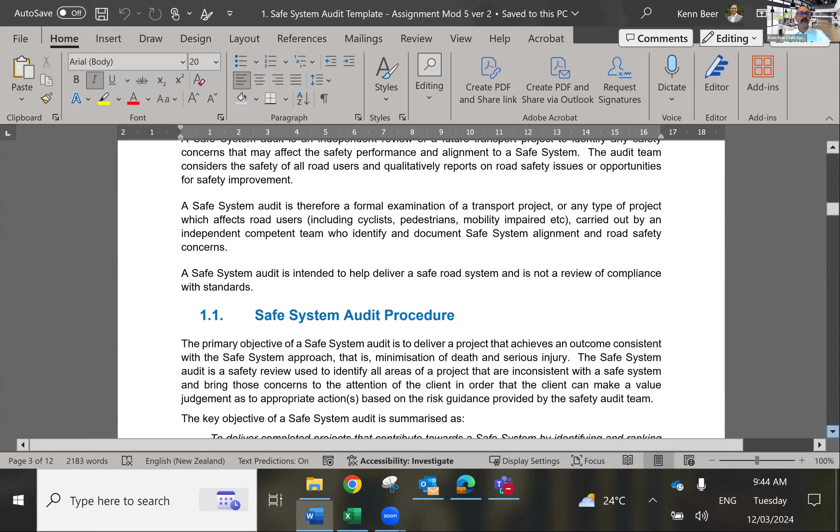But you are going to fill this out. And we've tried to help you here by highlighting in yellow things for you to fill out. So you see there's some standard words that are in all of these. So you just leave those words. You can have a read of it if you want to see what's in the standard wording. Then you've got your risk assessment matrix, which you'll be using. And you can see here, this is where you're starting to add information. So what's the type of audit? Concept / preliminary design stage audit, team members.

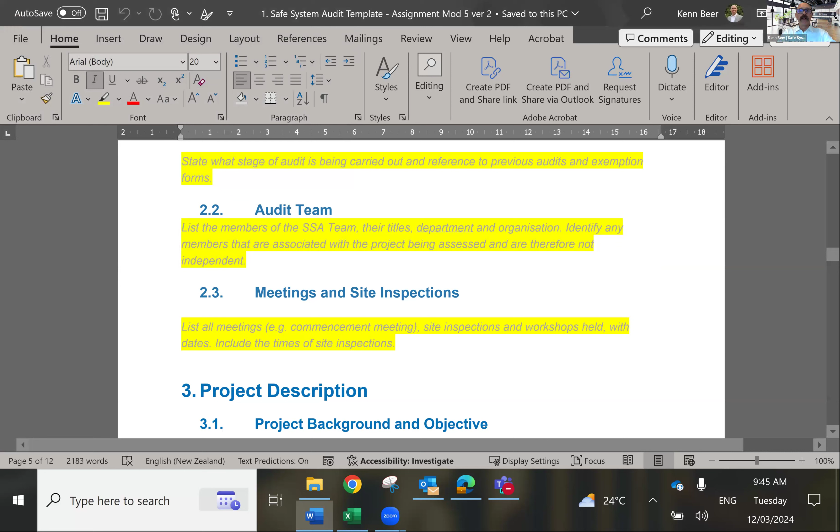Now, this is going to have to be done individually. Of course, when we really do them, we do them as teams. We are okay if you recognize somebody else is going to the same site as you, has the same plan as you. You sort of work together. You can go out there together to the site. You can chat about it, obviously, but we will need to see 2 separate reports, one from each of you with your own findings and wordings. We don't want just one report from the both of you or more.

You'll tell us when you went to site. In a real one, you'd pop in meeting times and those sort of things. So we've crossed out some of the stuff that we won't require you to do. You will not have enough context to really feel you're doing this comprehensively. Remember, it's a training exercise. You would love all the planning studies, lots of traffic data volume, turn movements, everything. You're not going to get that for the training exercise.

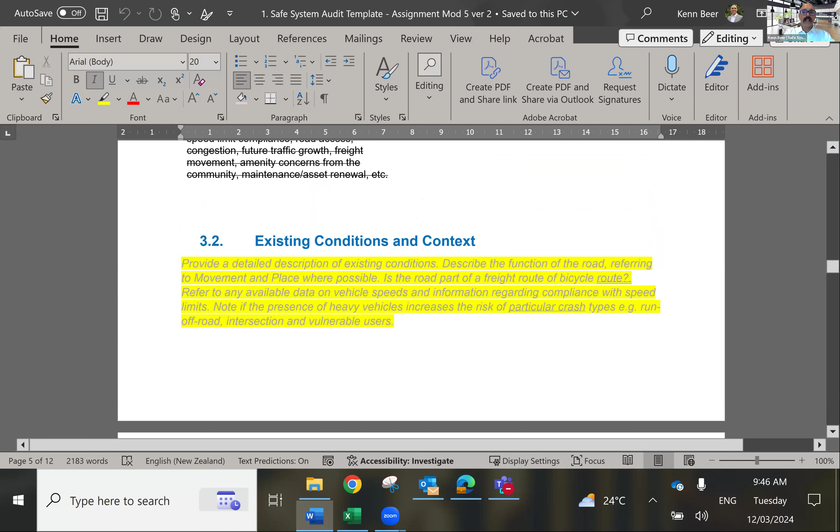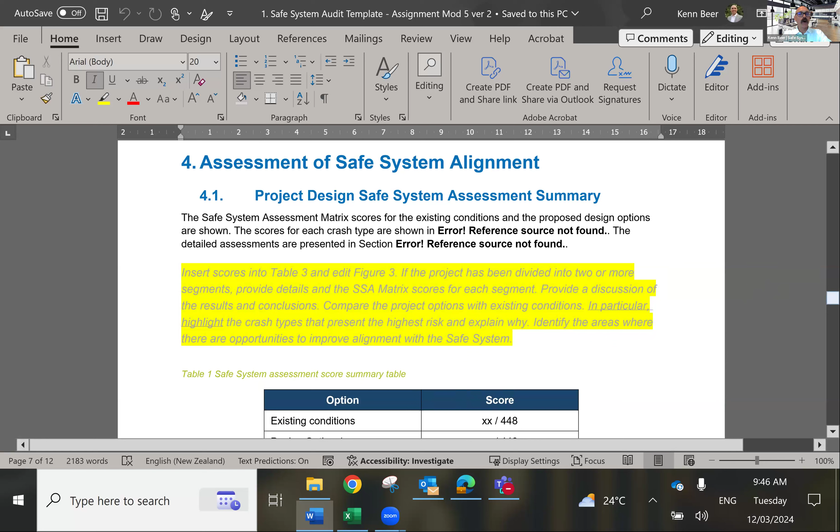You describe a little bit about the site here and the context with what you know and what you assume. You can give us as much as you understand in terms of what exists there and what they're proposing, what's the design. And then you're going to start doing your scoring. Now, you won't be able to fill section 4.1 out until you've done all of your scoring. And then you'll come back and fill that out. And you'll put in there a graph as well of the outputs. Now, you've only got one design option, so you'll be deleting a bit of that.

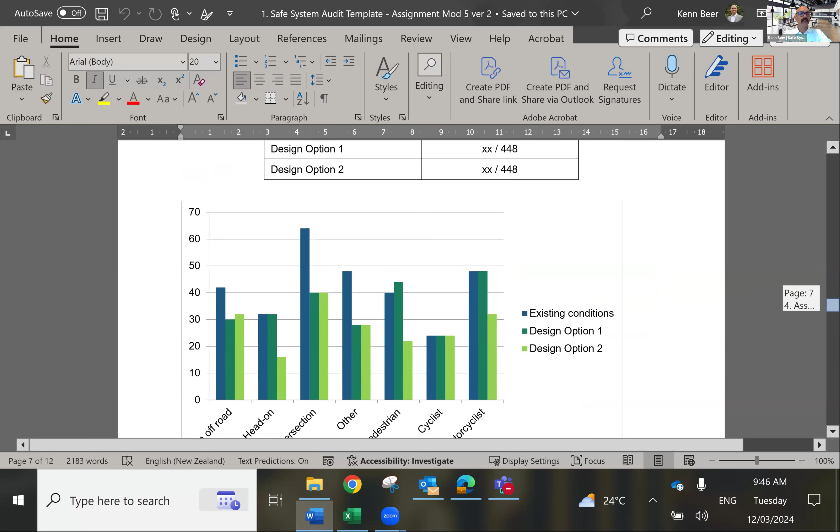And you'll be doing the matrix. Now, you've seen this, we've explained it to you. You'll do the existing conditions first.

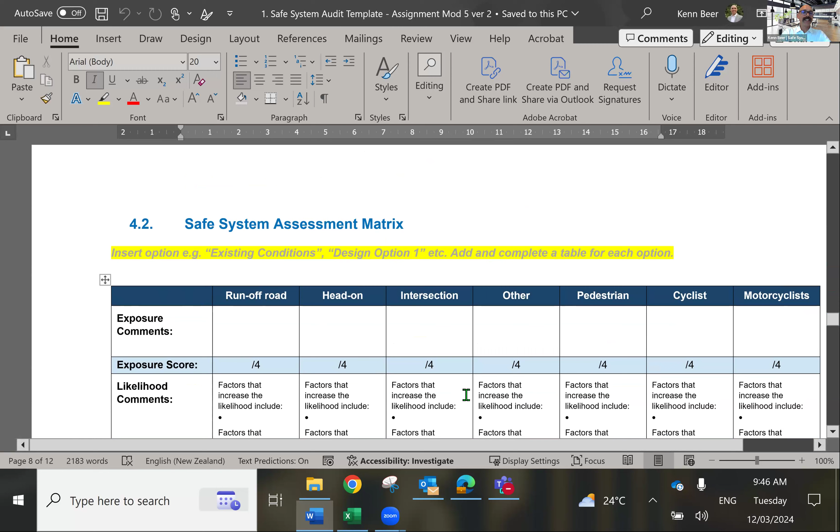You'll fill out all of this, make sure you're happy with it all. You'll copy it, paste it, then cross bits out of it, add bits for the design that you've got.

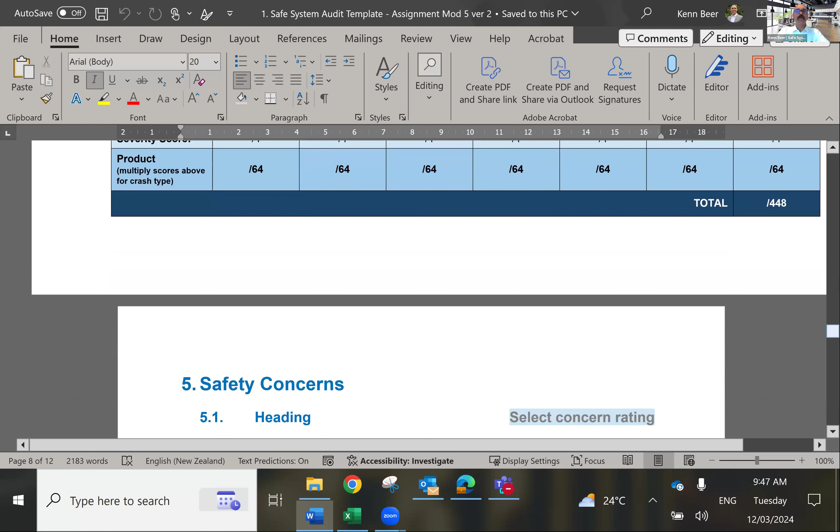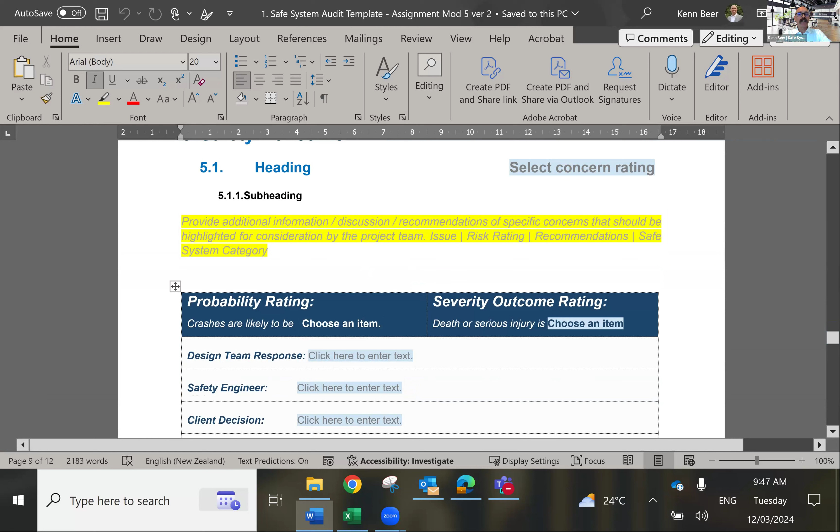And then we want you to write up just 3 specific safety concerns. So the Safe System Assessment Matrix will be done in full, and then you'll do 3 specific concerns.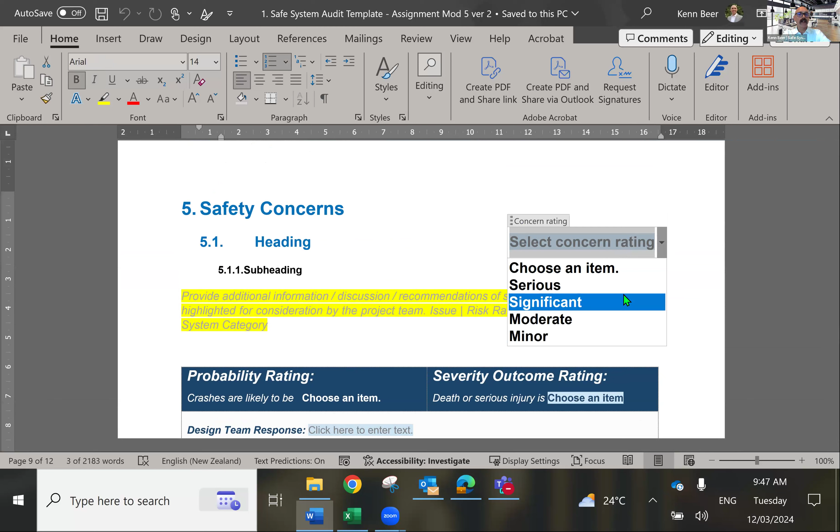That you'll take and flesh out. You'll add in the end risk rating you got, and how you got there.

So unlikely, etc. Now, this is all standard Waka Kotahi template stuff. You don't fill out the responses, okay?

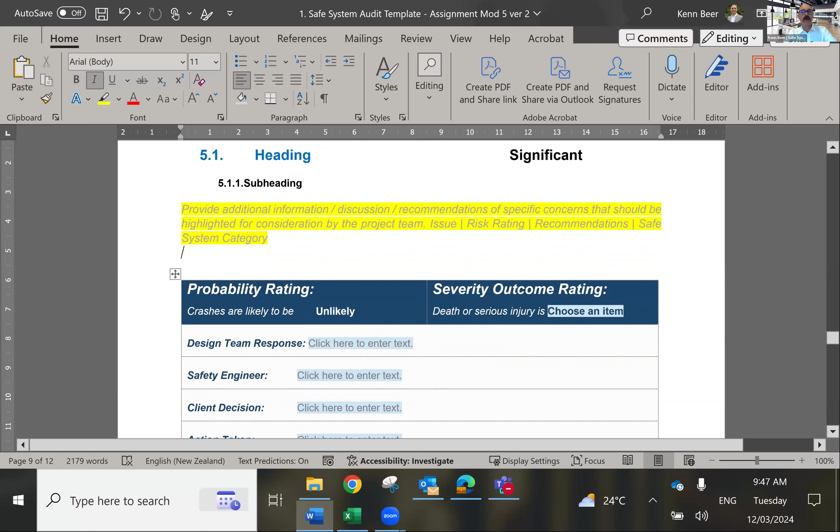You leave all of that blank because that's for whoever you would theoretically hand the report to, to do all of their responses. You'll be filling out this bit of information here and putting in those risk ratings.

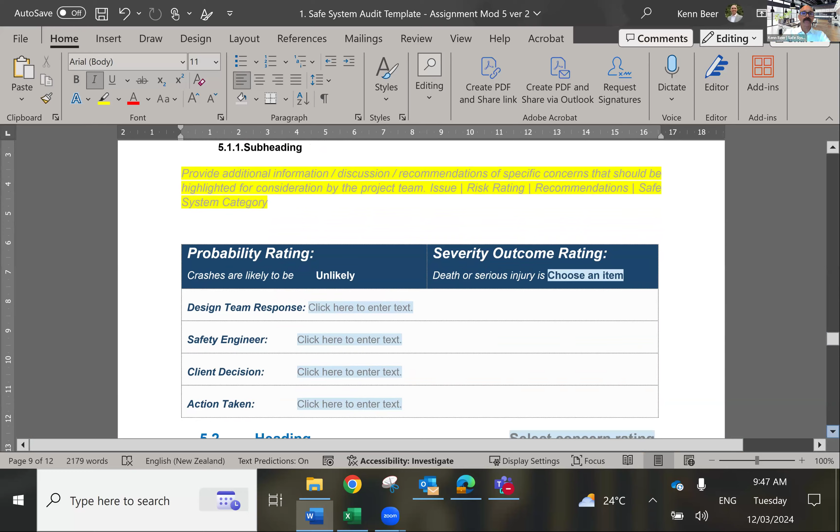So you do it for 3 findings. Just do 3. I know some of you will find many issues that you want to talk about. Just do 3.

If you do more than 3, the markers won't go beyond that. We just need 3 to prove that you've got a feel for how to write up an audit finding, how to risk rate it, how to provide some recommendations and categorize those.

You write a little conclusion, and then the last thing we ask here is to take a photo of yourself at the site, wearing your high-vis vest, being very safe.

Part of some of our requirements is that we know that you have gone to a site. You understand the value of going to a site to see the context, how it all works. So just prove to us, take a selfie of yourself out there on the site in your high-vis vest.

You'll sign it, and that's just to make sure you understand the practice that we do, sign our reports, and your safe system auditor in training. If you want to put a position in a company, you can. You don't need to do that.

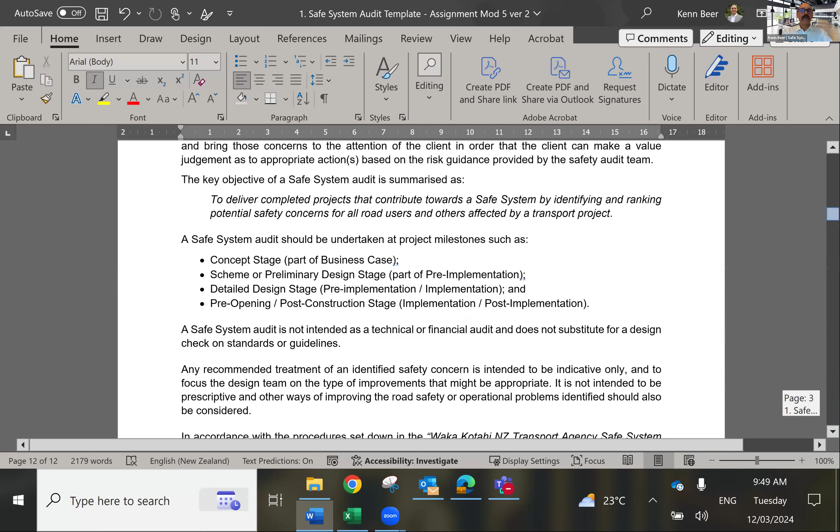Okay, so once you've done all of that, then you will PDF it. Save as PDF, and then you will upload it to the site. Now I'm in teacher mode, so it doesn't have that upload option.

Actually, I can just change that. I've got a second to do that. Switch role. Sorry, bear with me. Let's be a student.

And so you've got all of that, and then hopefully, yeah, you go. So you've saved that, filled everything out, add submission, and then you'll be able to drop that submission in there.

Or find it, and yeah, you'll submit that and it will be marked.

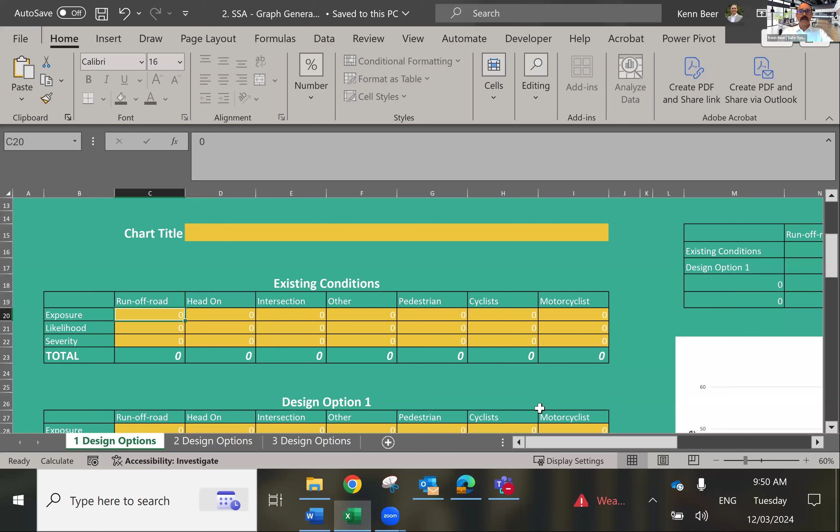Now, to create the graph, just to make your life a little bit easier, we've got this little graph generator. I mean, you could make this yourself in Excel in no time, I'm sure, but just to try to make life a little bit easier.

When you're doing the Safe System Assessment Matrix, you can...

Pop your numbers in and you can see it spits out your existing conditions, and then you can do your design as well. And then you'll be able to either just copy that or snip that and paste it in.

Just so you don't need to fiddle around too much creating the graph. But that's, so you're welcome to make your own, of course.

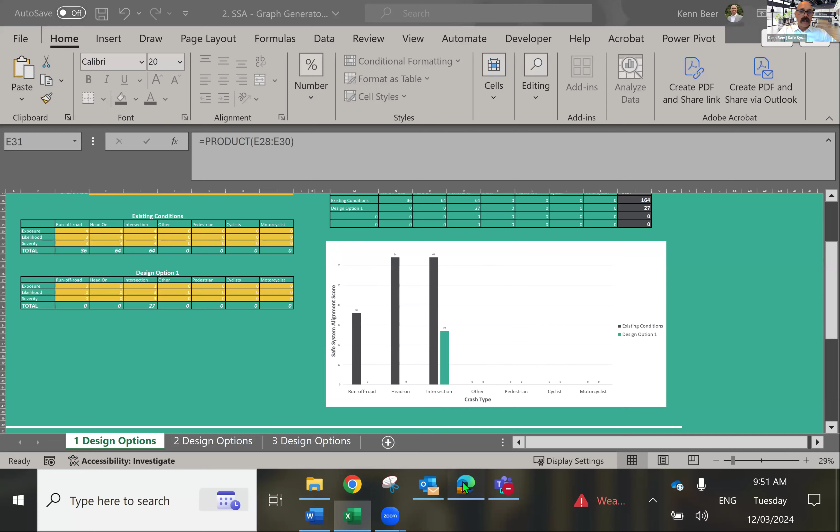So let's go back to the learning management system. You can see it opens today, or it's open now, but it is due on Thursday the 21st of March. So you do have a bit of time for this, okay?

So you've got some time. My suggestion is you download your documentation pretty quickly, make sure you've got your head around where's my site. Is that convenient, or is that over the other side of the country? And if so, get that changed.

Have I got the template? Okay, I can see that. Have I got the example one? Good, I've got everything I need. I feel comfortable to be able to do this. And then ideally start going through that process, get out onto the site and start working your way through it.

Because next session is a great opportunity to ask questions, to find out some specifics. If you're confused by bits and pieces, that will assist others, no doubt.

If you're having a challenge, others probably would be having similar challenges. So we can discuss that. I can help with that, answer questions, guide you.

Anytime throughout this whole process, you can organize a one-on-one coaching session with an experienced safe system auditor who can answer questions, help you interpret the designs, talk to you about the matrix or the findings or how to report things, and really delve into that if you are having trouble.